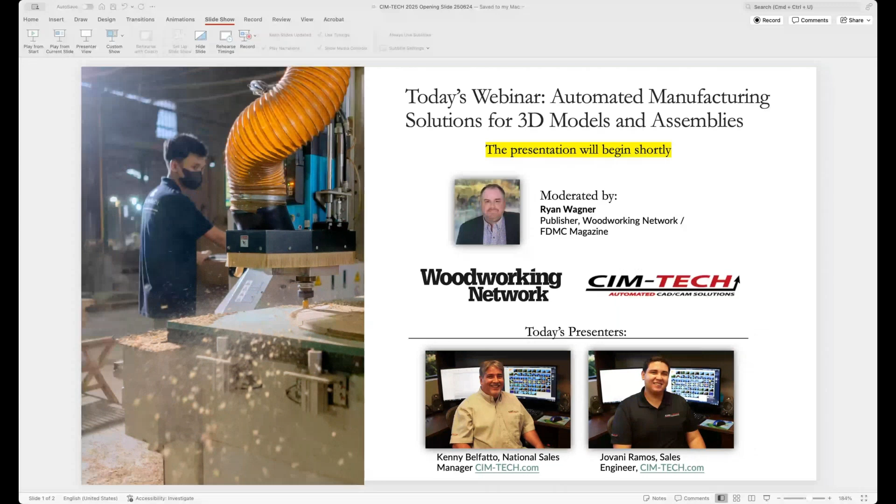Hello, everybody, thanks for attending. Happy Tuesday, everybody, today we're going to talk. Hey, there's Giovanni. Hi, Giovanni. How you doing? All right.

Today we're going to talk about the automated manufacturing solutions for 3D models and assemblies. As we move forward in time, more and more people are moving to 3D models. You always had 2D drawings, but this is the next progression. We'll start drawing in 3D models and assemblies and see how we can manufacture those and make manufacturing easier.

CIM-TECH is the company that makes the software. Our name, CIM-TECH, is also our website, with the dash in there. It's a software company that's been founded since 1986. Even back then, we realized your machine is only as good as your ability to program it.

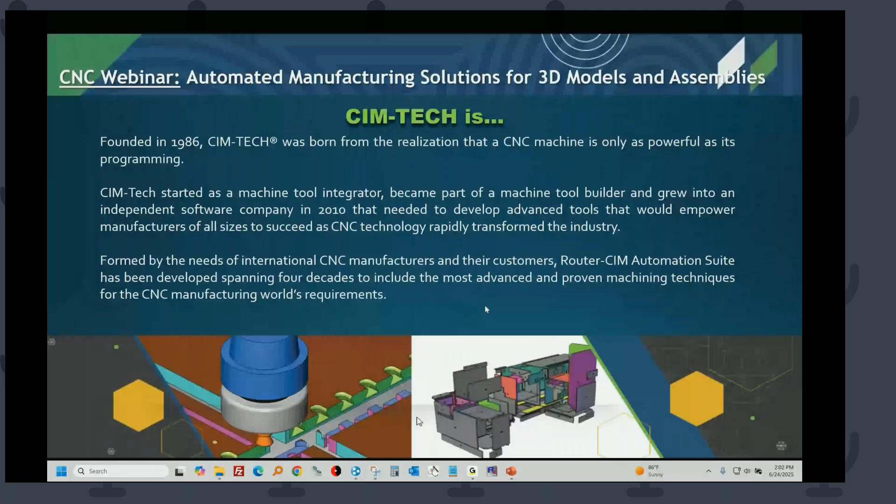You're going to spend a lot of money. Hey, sorry bud, looks like we cannot see your screen at the moment. Oh, all right, sorry about that. Let me find out what it takes to see that. All right, sorry about that folks, I had to pick an extra button on there. Thank you for alerting me to that.

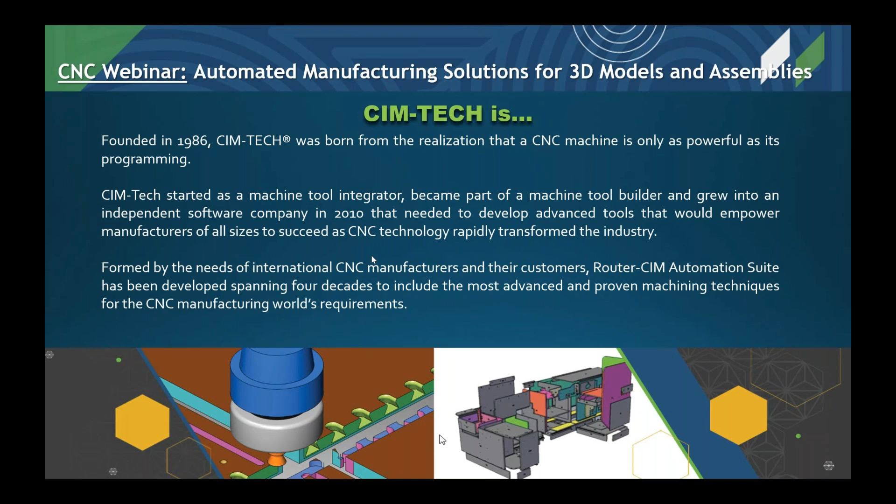Here's our website, cim-tech.com. Again, we realized that your machine is only as good as your ability to program it. Back then, we became one of the first integrators within AutoCAD, so we have both CAD and CAM integrated in the same place. All these features were generated in Router-CIM specifically for CNC routers. It wasn't a different type of package that's converted for woodworking - this was from its inception specifically for CNC routers.

Today's discussion, we're going to talk about the benefits of modeling in 3D. Again, like I said, you always had 2D. Well, with 3D, you'll be able to do a lot more visualization and more information about the design gets captured with the 3D model. Then there's going to be some bottlenecks - it's nice to be able to model it in 3D, see the whole thing, get the weight and all the mass properties and so forth. But there could be bottlenecks, and we're going to show you how we can eliminate those or get past those.

Using this program called Solid-CIM, it's going to bridge that gap and let you take the 3D model all the way through to manufacturing with the least number of clicks, the least number of steps on your part, and give you the best results in just a few steps. After this presentation, we'll have some time for questions and answers as well. I'm also available to do a personal demonstration for you at any time.

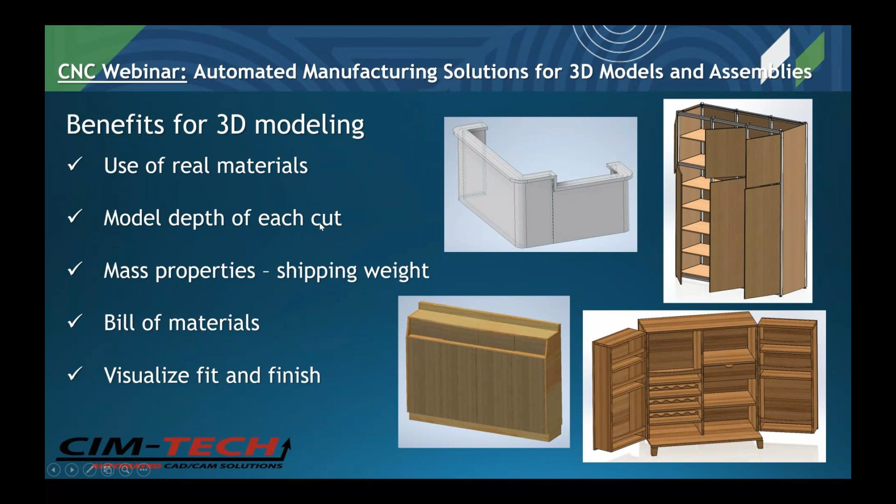All right, so we've got some pretty neat pictures on the screen here, and some of the benefits. Well, first off, you can use real materials. You get photorealistic rendering, and that allows you to visualize the product completely assembled. And those material names you use in your modeling program carry across to the manufacturing as well. When you're modeling, you're putting in the depth for counterbores and dados and rabbets and pockets. That depth carries through to manufacturing as well. When you're in 2D, there really isn't a depth, so we don't know how deep to drill the hole other than a note.

You get other things too from 3D models, like mass properties. You can figure out the weight of the product, the center of gravity. There's a lot more information in the model when it's in 3D.

You also get bill of materials, so you'll know, for example, the total number of square feet of a specific material. So you'll tell it 3 shelves, 4 doors — all the information is in a bill of materials on there.

And you get to visualize the fit and finish. So if there is anything that doesn't close properly or when you assemble it, the program can show you interferences, and it can tell you how much of an interference there is between doors, for example.

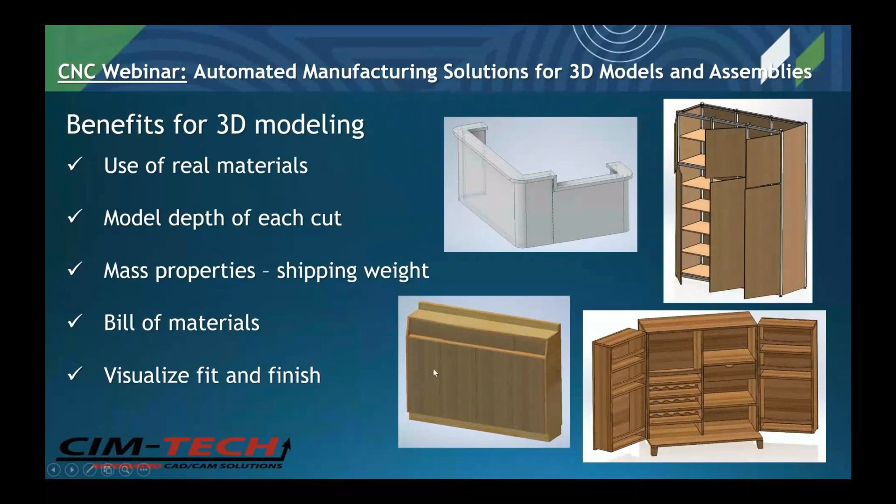Just some of the benefits for modeling in 3D.

Now there could be some bottlenecks too. Traditionally, what people do from a 3D model is make a drawing view. They'll look at it from the top view and make a drawing view, and that gives you an outside edge, the cutouts, the counterbores, the countersinks, holes, and things like that.

But you don't know the material it's on. You don't know the depth of cut for any of these interior objects, and you don't know the thickness from the outside geometry.

So to overcome those bottlenecks, we have the solution with Solid-CIM, which is going to automatically pick up the depth of cut, the material — all the information from the model gets transported.

You can also put in things like label fields in your models as well. You can add those what's called part properties — things like due dates, customer name, work order number, and things like that.

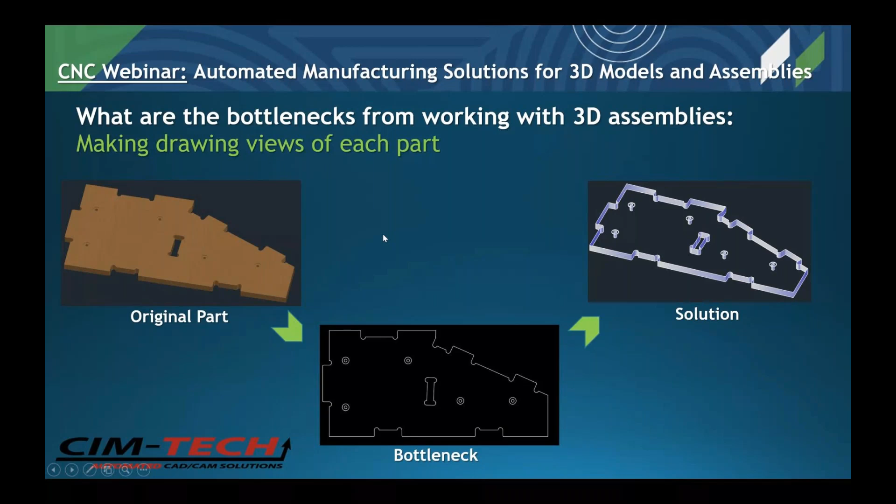So these bottlenecks, we're going to eliminate those using Solid-CIM, where we're going to pick up the name of the part from the solid model, the material from the solid model, all the depths of cut from the solid model, and also any of the extra properties for label fields.

And you'll get another cut list here. It also sizes up the panel so that you can use that for a panel saw if you like.

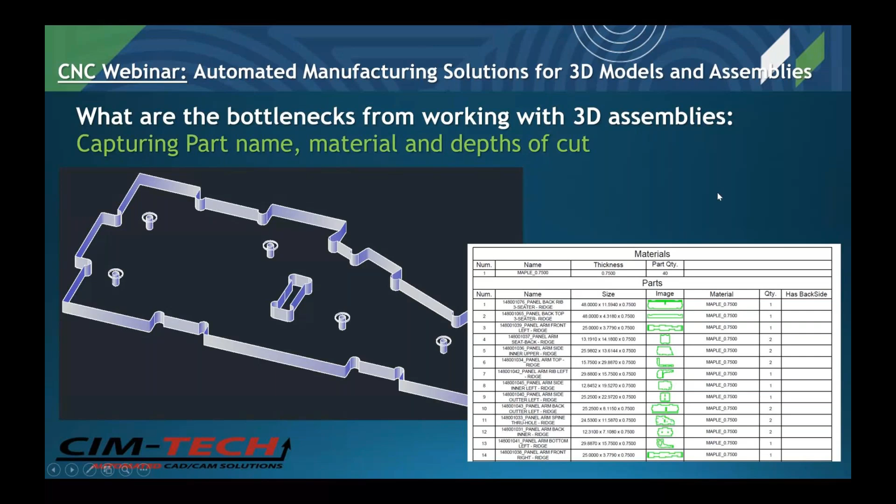All that information from the parts also gets transported through to labels, and you can customize the labels with Router-CIM, because a lot of parts are going to look similar. So you're going to want to make labels so you can find out which part is which.

Some of them might only be just a fraction of an inch off in dimension, so labels become very important, especially if it has the panel sizes on there. You can put whatever bits of information you want onto the labels. We've also got an advanced labeling feature called Touch and Print that lets you touch on a part and print a label.

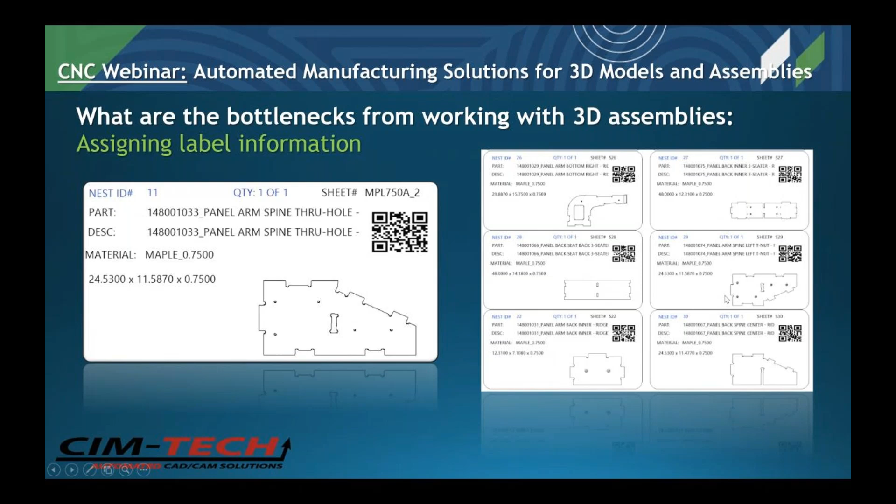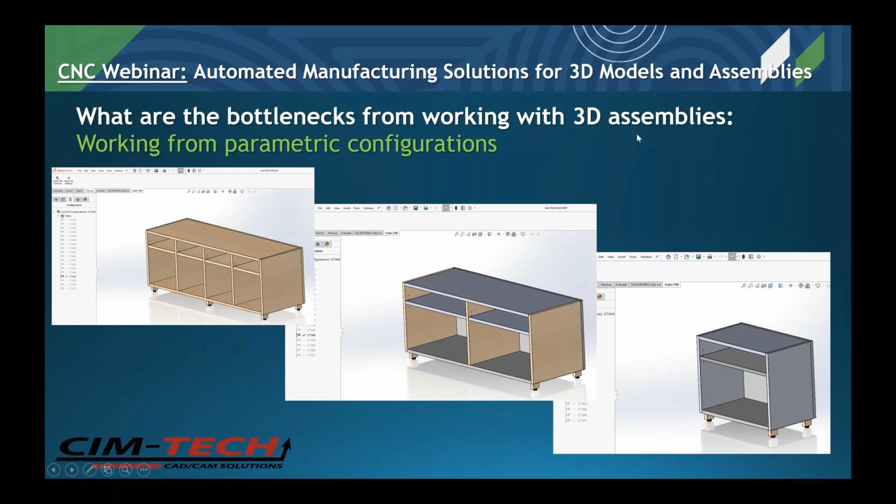You make the configuration you want on the screen, you pick a button called Solid-CIM to go ahead and cut and nest those parts. Big feature — there is no comparison to anything in 2D like that. So you can do these configurations.

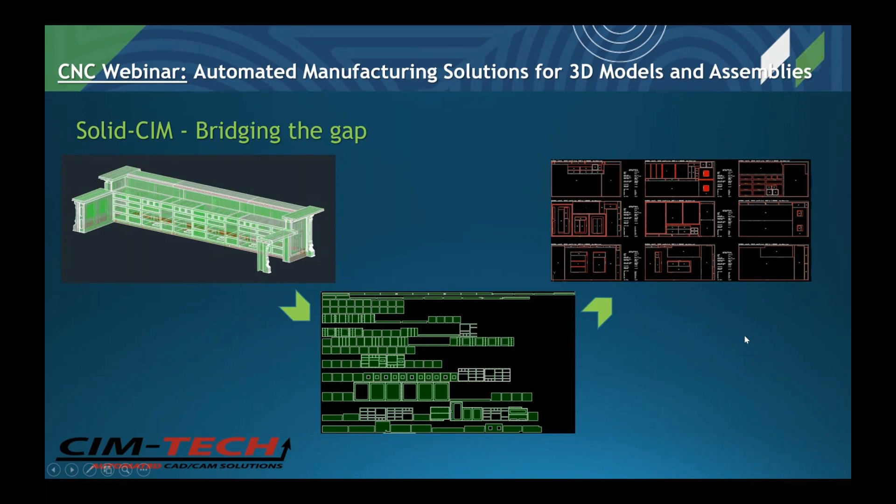Of course, you'll have full control over the grain, and also which side faces up. If there's counterbores on one side and dados on the other, the side that had the most volume and material removed will face up - so the dado side would face up by default, but again, you can change that. And your nest results can have parts inside of parts and multiple stock sizes, stay down, common line, different types of solutions. So let's take a look at a demonstration, and I'll guide us through it.

Here's our web page, CIM-TECH, because there are a lot of different CIM techs out there, so we've got the dash in the name. And again, this was established in 1986 with the same group of guys making the software.

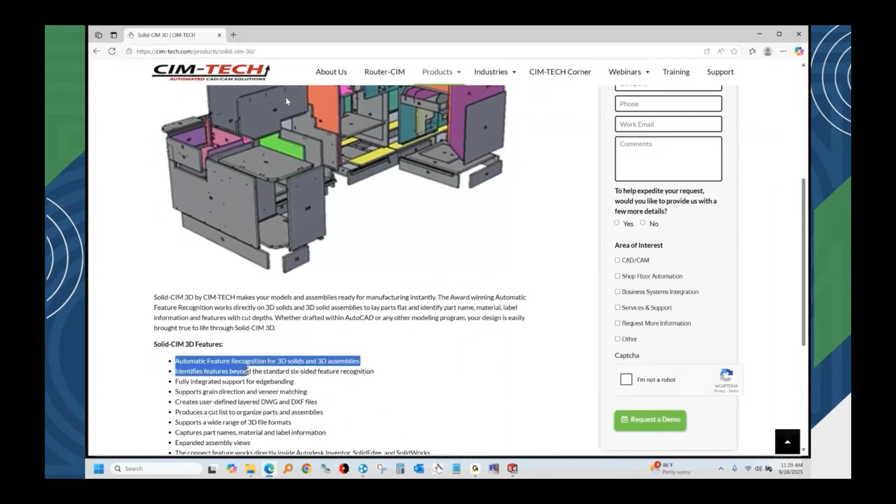We've got a whole suite of products. The Solid-CIM is the one that was uniquely designed for the 3D modeling. It does what's called automatic feature recognition.

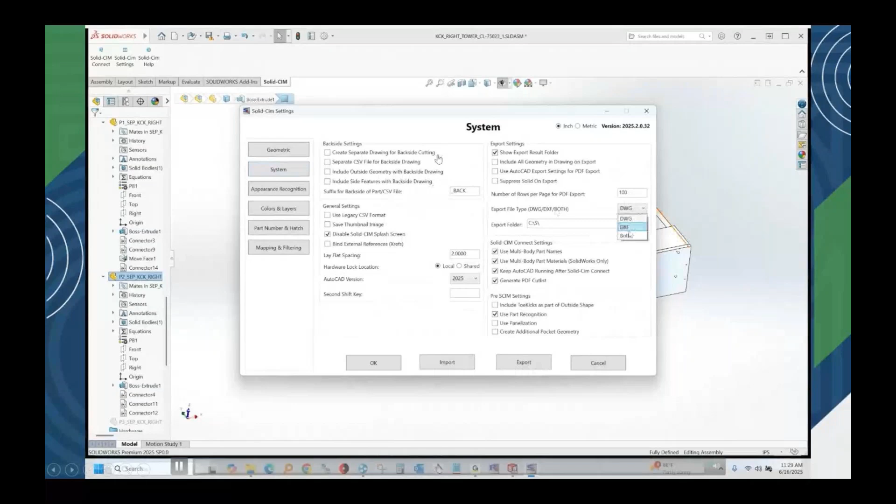Now here's an assembly from inside of SolidWorks, and the parts have a material in SolidWorks and they have a name in SolidWorks. And you've got some settings so you can ignore things - you know, if it's smaller than a 4-inch cube or thicker than 2.5 inches, you can put in these minimum and maximum settings. It'll make drawings or DXFs and you choose the layer names.

It'll put things on different layers for you, so any kind of holes will be on layer hole. You can also exclude or include different properties of the objects in the assembly - so take only materials that begin with MDF. You know, if you had glass and stainless steel and things like that, you could exclude those, or you could just say give me the MDF material.

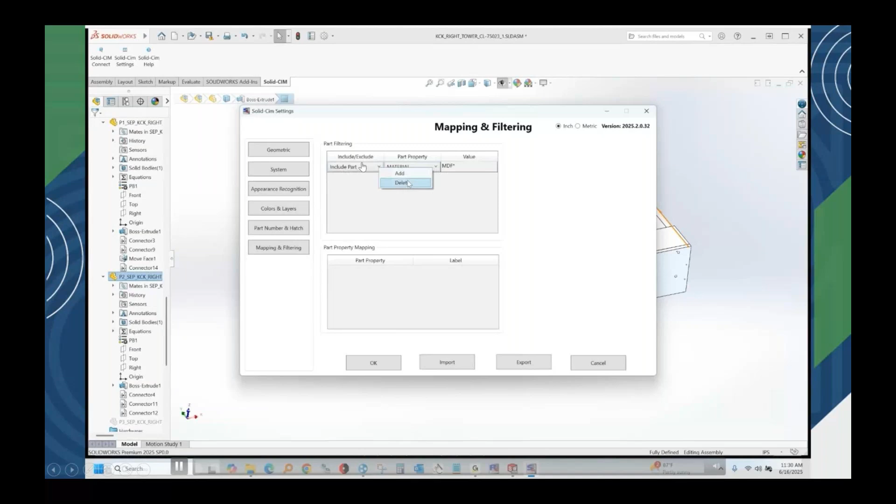That's a new feature in Solid-CIM 2025 that makes it so you don't have to suppress anything. Now it's just one click in SolidWorks or in Inventor or in AutoCAD - just one button pick that does the automatic feature recognition. And what this does, it converts the model into those intelligent drawings with geometry on different layers.

This just takes a couple seconds, and it's going to give us a cut list that has the name of the part, the material, and the quantity. It's going to have all that information built into the cut list, and then we could just cut right from the cut list. So this is the feature recognition process.

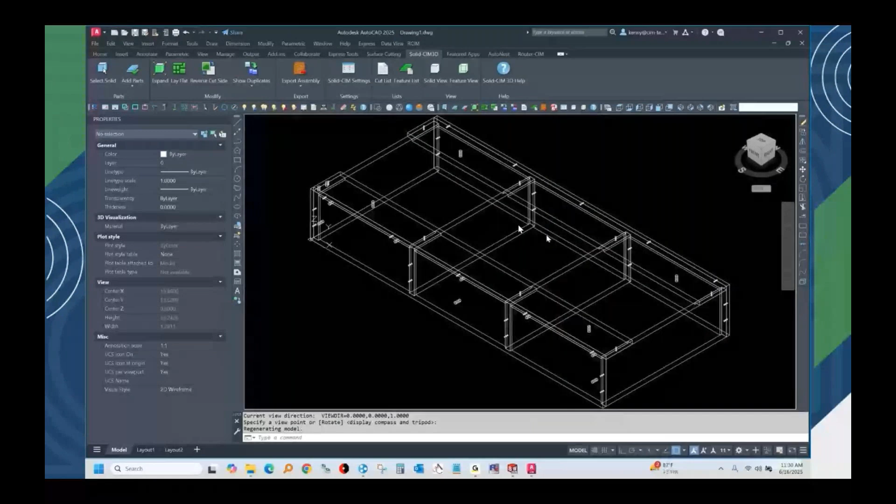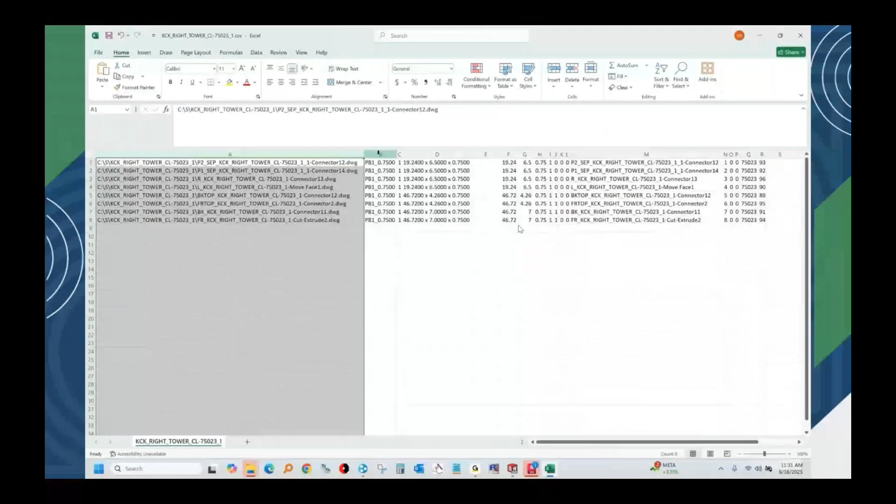It's inside AutoCAD now, and here's a CSV file - it's like an Excel spreadsheet. That's the cut list. It creates that, and there you'll have the names from SolidWorks are in there, and their materials are stored in the CSV file or the cut list. So there you see name of part, material, and quantity. Then there's the different panel dimensions and the different X, Y, and Z panel dimensions as well. And if you had any label fields, they'd be in these other columns as well.

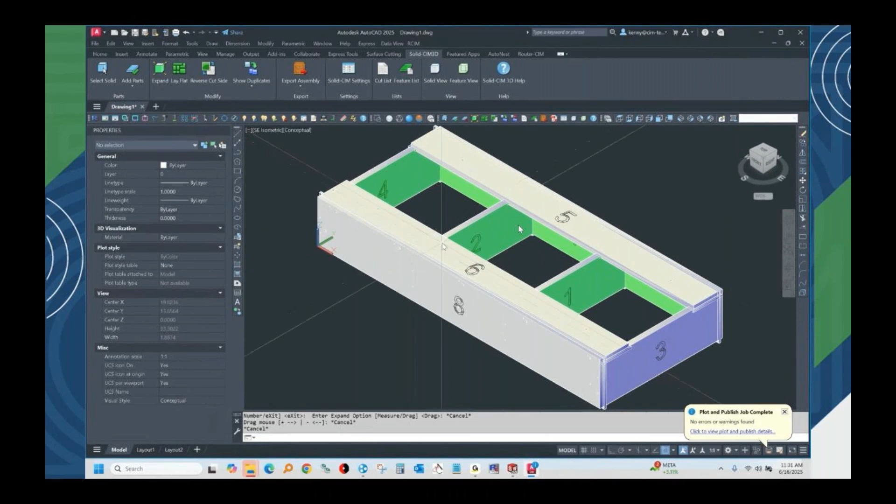Now, right from that CSV, you can cut it, and then it begins processing the toolpaths and making all the single part programs, the labels, and the nests and everything else. But before I do that, there's a neat command here called expand, which is useful to see like an exploded view of the model. You can either type in a distance or you can drag with the mouse to do the exploded view. This is useful because you can make a copy and paste this into a Word document or put it in a PDF file.

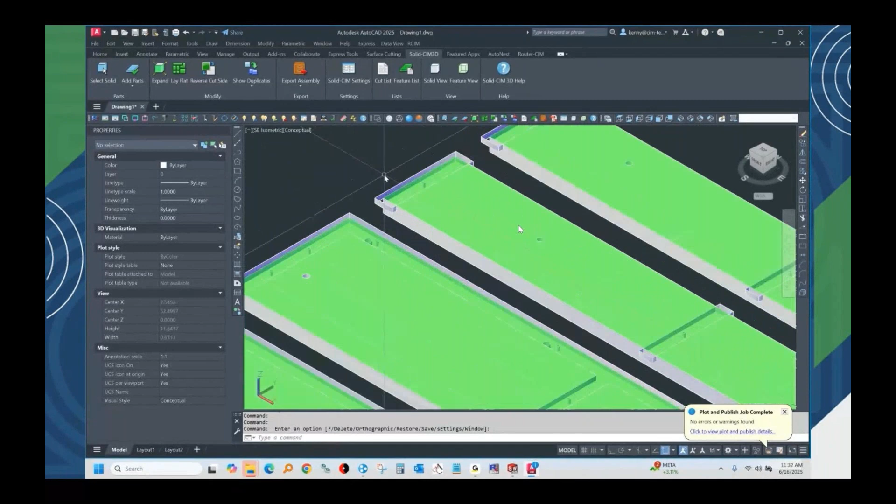At this point, it's just a picture, and then you can see in AutoCAD what the features are. It made something on layer pocket cut, and it picked up the depth that was specified when they modeled it. We have a rounding feature as well - if you've got pockets that are 0.24 and 0.26, they can all be rounded out to 0.25 in the layer name if you like.

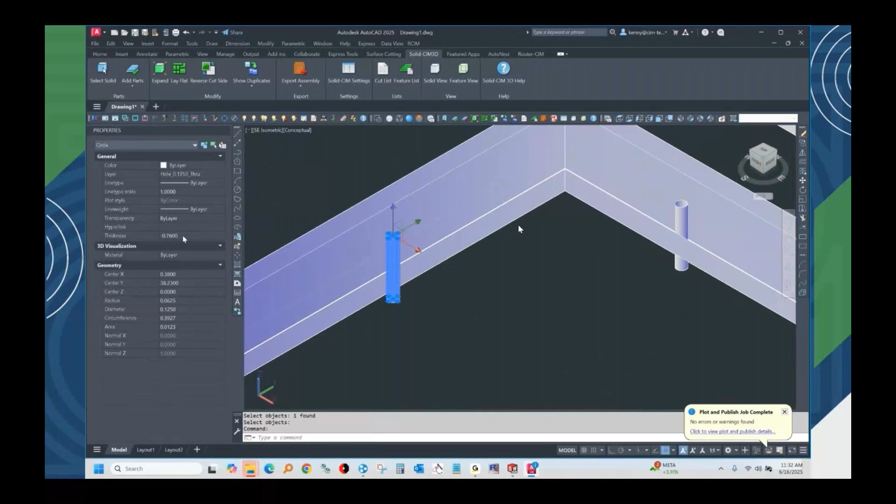There's some holes, or drill holes. They're on a layer called hole with the diameter and the depth. That's the step that saves the most amount of time, especially if you're used to working from 2D drawings, making a drawing view of the model.

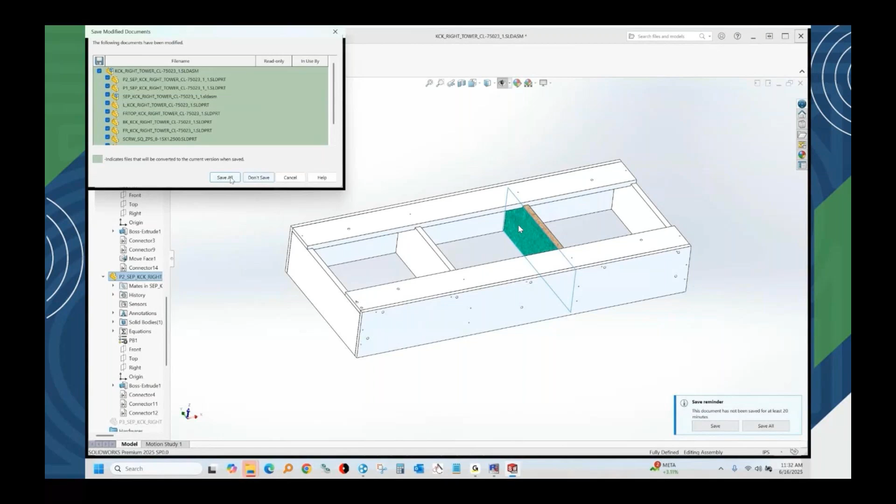It picked up all those depths. It picked up the material name. And in the next example, they'll also have the label field information. So here they're going to cut that CSV file, optionally save the model, or just exit out of SolidWorks altogether. And now the Router-CIM program is going to go and act on that CSV file.

Now, this is showing you our Solid-CIM and Router-CIM program right out of the box, but we also offer something called Auto-CIM, where you can just drag and drop Excel spreadsheets or 3D models into a folder, and they're acted upon automatically. So we do have quite a bit of automation included right out of the box, but if you want even more, we can have completely hands-off manufacturing, and we could talk about a program called Auto-CIM with you if you're interested in seeing that.

It's completely hands-off. You just drag and drop models or spreadsheets. There you can import from CSVs and from Excel files. They're importing this CSV file. It knows what each column is. It knew that the name was the first column, then the material, then the quantity. But you can map out your own spreadsheets and tell it that the first column is quantity, for example.

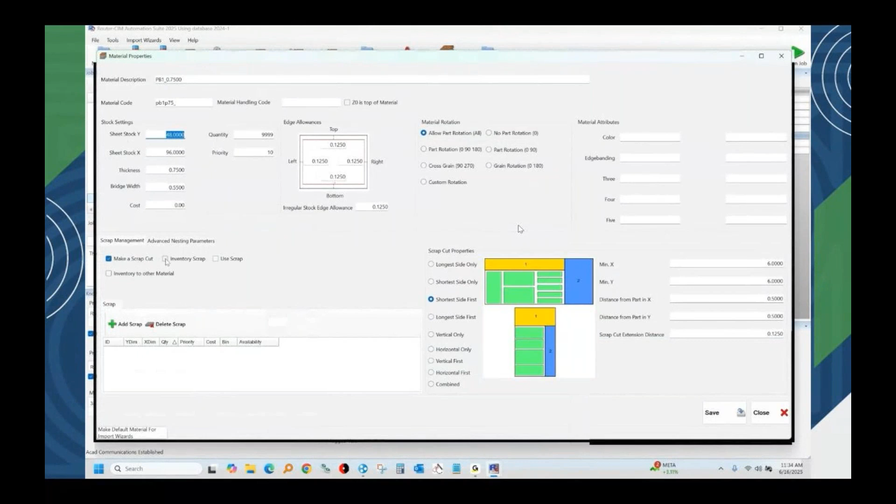There's your material properties and whether things can rotate, make scrap cuts, save scrap, use scrap, skeleton cutting. You can also put in alternate sizes. So if you have materials in 4x8, 5x10, 5x12, we can nest by yield or by price or priority. So you can tell you have 5 sheets of 4x8 and then 6 sheets of 5x10 and 8 sheets of 5x12. You can put in these different material sizes and their costs, and then you can nest by priority or yield or price.

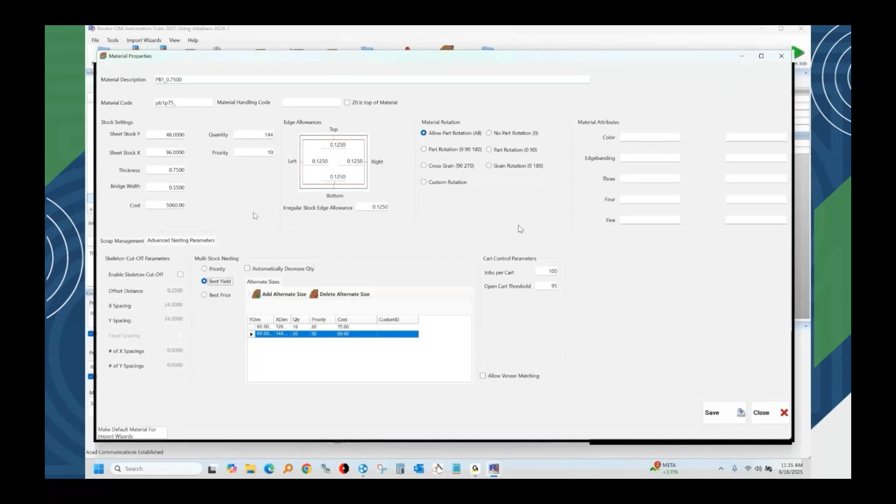So they did add 5x10, 5x12, put in different costs, and I'll check the box for best yield or best price. And it goes through the list and tries nesting in all the different sizes and gives you the best yield or the best price. If you don't like having a lot of scraps, then best yield will fill up the sheets for you pretty good.

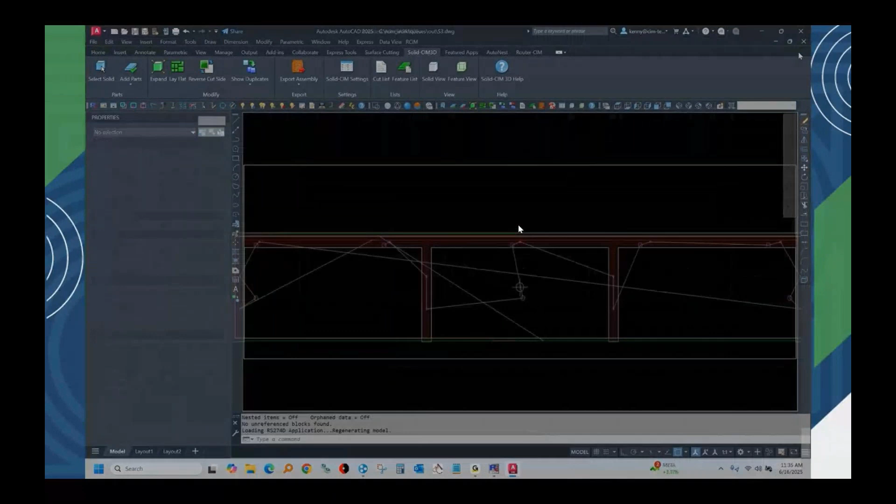They're also going to do a part multiplier, 10 of these. So you could say why just make one? Let's make 10, 20, 30. You can also mix multiple jobs together. So give me 10 of these with 5 of these and 6 of something else. And all of the MDF from those jobs will nest together. All the plywood from those jobs will nest together. So there's advanced nesting features in there.

At this point, it went through and processed the parts and lays them out in the nest. And there it looks like one of the larger sheets and 2 of the smaller sheets. And each one of those gets printed to a PDF file or to a regular printer or both. You can do electronic print or hard copy print.

And when you open those results, you've got all the data there for your single part programs, your nested programs, your labels, your reporting, simulation files. It's all saved, and that can go to your local drive or to a network drive. There's your NC code. And of course, we make post processors for just about any machine out there.

And the PDF file has, this would be what would print out to a printer. How many of each sheet? Looks like I used 2 4x8s and 1 5x12. And it prints those out as well.

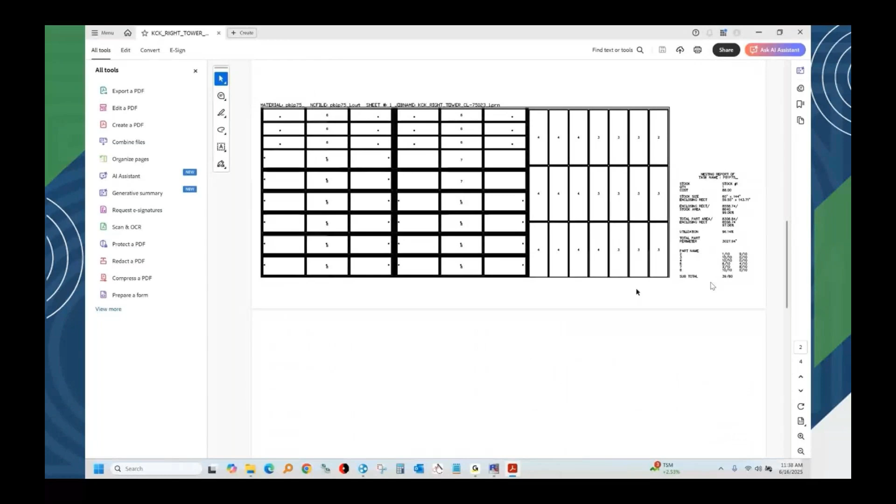So you can see where to put the labels on there. It's got the part numbers on it. That's the part number of the row from the spreadsheet. Here's your labeling. So RouterCIM includes the full labeling, and you can customize these with whatever data you like. You can put 1D barcodes or 2D barcodes on there.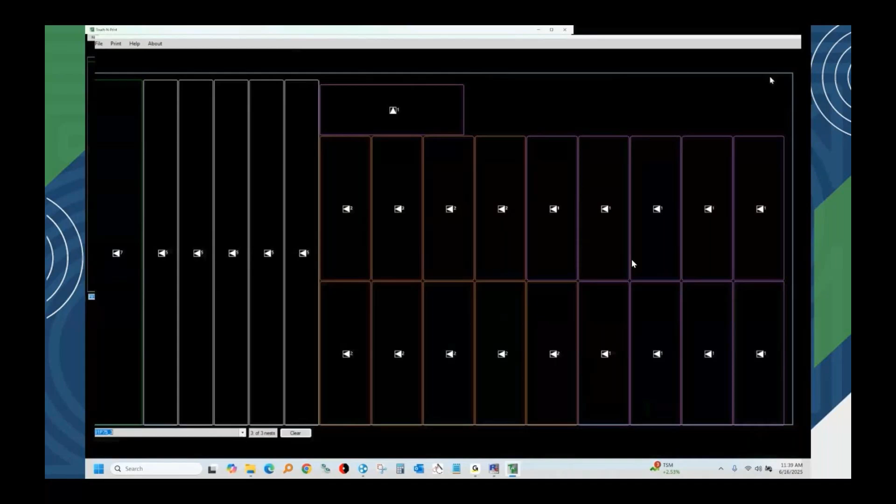And then there's also the touch and print program that I discussed. This lets you see what the nested sheet looks like, and you pick a part and print a label. Pick it and print a label. I had it set to print to PDF files, but you can print those to the Dell or the HP LaserJet, and they'll print whatever printer you want. And it shows the whole job, and you touch and print, touch and print. It's like on-demand type of labeling, right? Otherwise, you have to look at the sheet and see where you're going to stick the labels. There's all the individual parts with their toolpaths on them and the individual programs.

So that's for a remake. Let's say if a part moved or fell, you could remake it with the program already there for you.

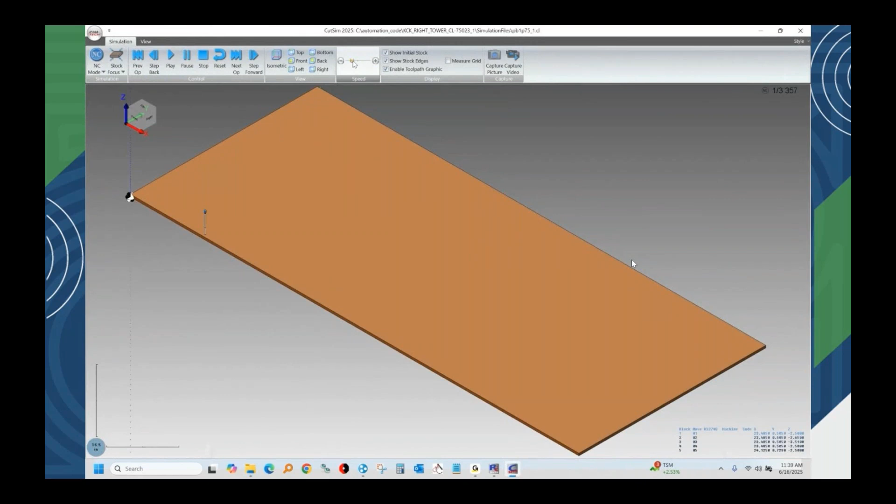There's a simulation as well that lets you pick and see what the toolpaths look like. I think with this one, I used the tool stay down type of nest. You can set the speed, and you can make this into a video as well.

But it's basically showing you the sorted order, and we use what's called a rank number. So my drilling, for example, is rank number 1, the dados are rank number 2, and cutouts are rank number 3. You can make something that's rank 1.5, 1.6, 1.61, so you're never stuck between any 2 numbers. You have an infinite number of other toolpaths that can be ranked.

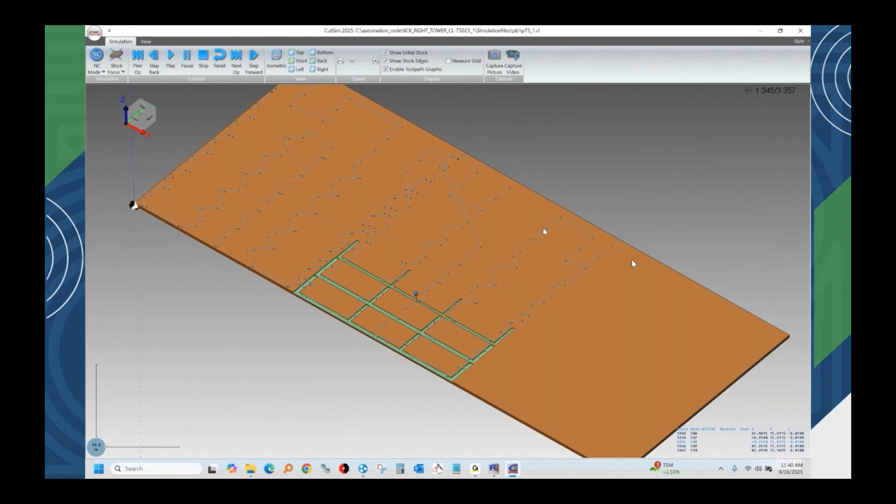But that's the order at which you cut things in, right? You don't have to pick each one of those pieces in order. When you want to make the program manually, you'd have to touch everything to tell it, I want this, then this, then this. We can sort that order for you, and it does go in a closest point. There's all different sorting methods that we have as well.

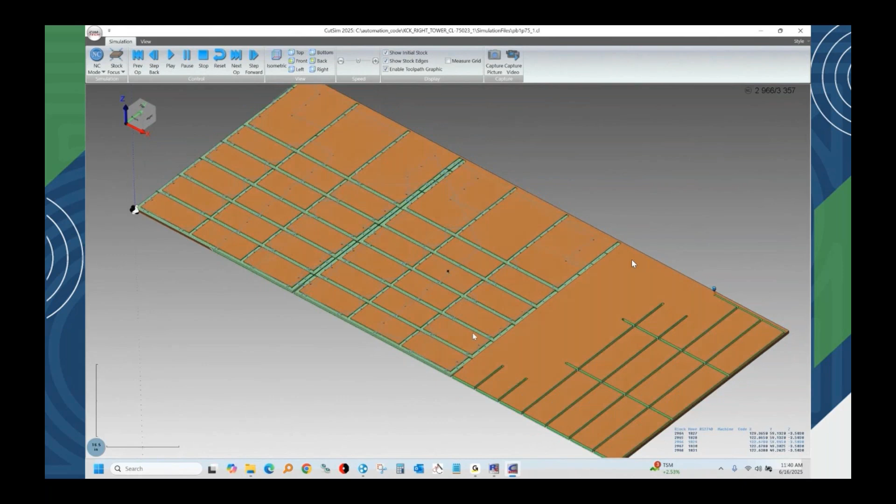And there's the stay down nest where the tool is staying down and connecting from one part to the other without lifting up, and that it's great technology for reducing cycle times. We can also do common line and 2-sided nests as well.

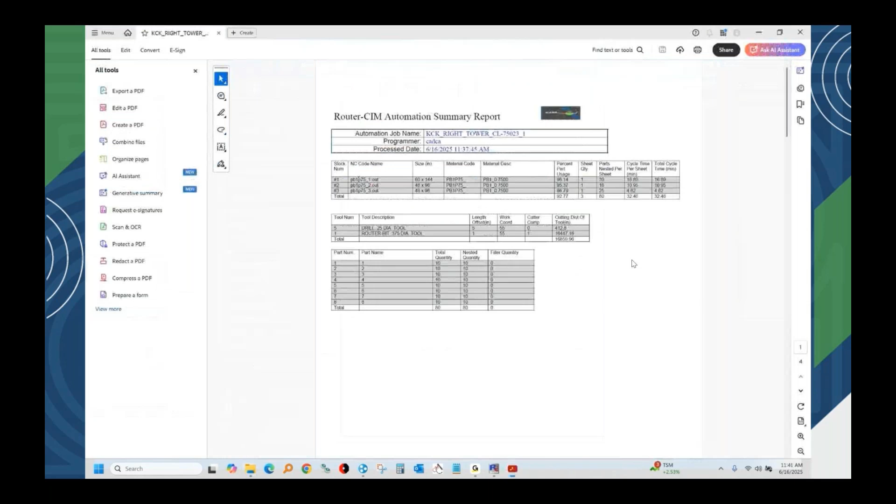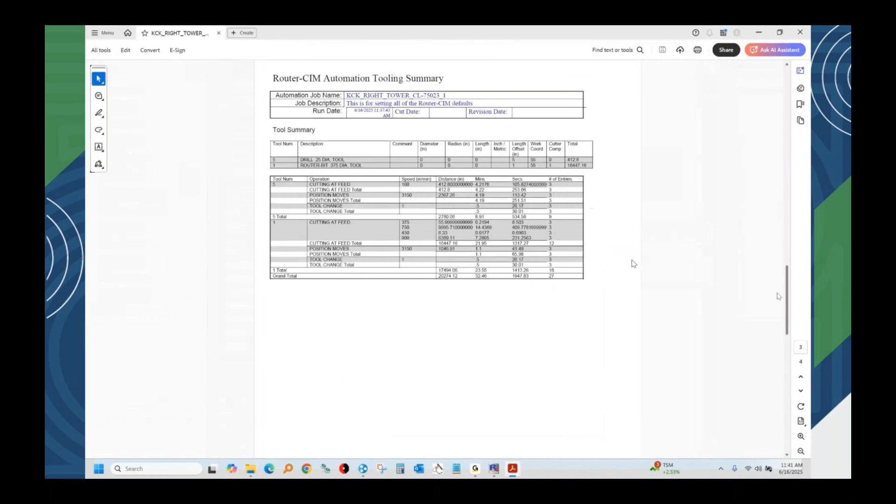You get a lot of reporting with Router-CIM, and the reports have your cycle times for the whole sheet, how many parts are on each sheet, what kind of scrap area you got. All the reporting is saved as either PDF or Excel files, and you can use either one, it saves them both. And you can estimate jobs before you take them.

You can run the whole job, find out how much material you're going to need, and how long it's going to take to run on the router. All that data was stored from running that job, and it was really just 2 clicks.

One click from inside SolidWorks, it did the feature recognition. Then another click on the cut list, or within automation, pick import from SolidSim and then run it. So it's very few clicks.

Now here's a different example from inside of Inventor, and it's almost identical, it's got a different toolbar, right? So they open up an Inventor assembly. And these, when you use an Inventor, you give everything a part name and you give everything a material.

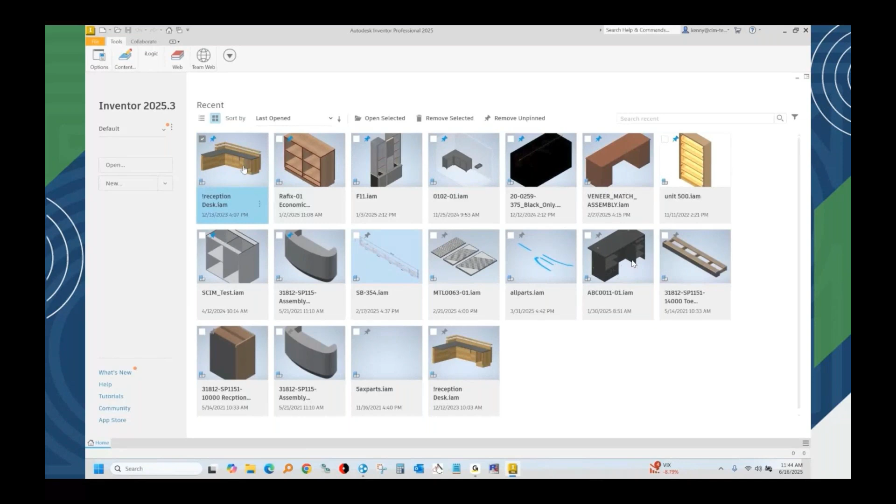And by the way, even if you don't use materials, we can do it, we'll just separate everything by thickness then. So if you leave everything on generic material, if you don't assign any materials at all, then we're going to group them together by thickness and say material 0.75, everything that's 3/4 of an inch thick, right? Material 0.5 would be all your half-inch material.

So it's worthwhile to use materials because, of course, if you use the materials, you get photorealistic rendering. That's a big advantage to the materials. Plus, that has a density, so you can get the weight of the parts, maybe for shipping, for example.

These parts are on a material called maple. This one is on a generic material, so that'll just be called material 0.75. There's some SWPL, solid wood, plywood.

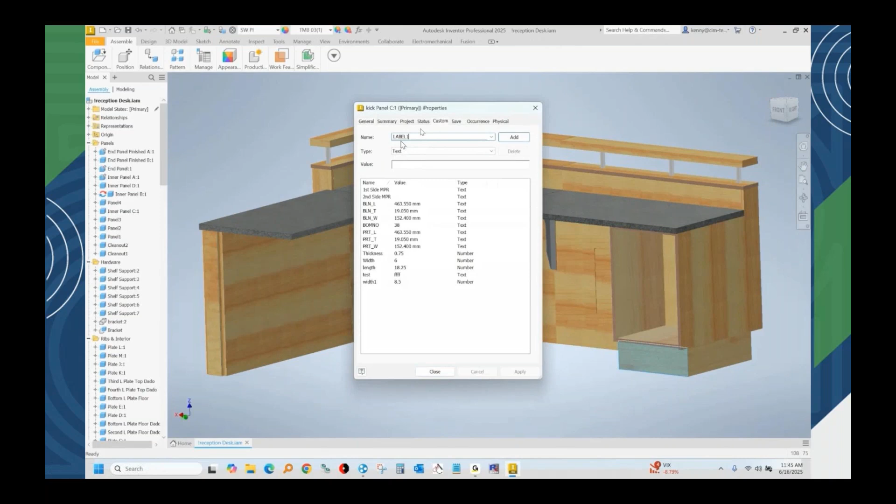Here's the iProperties, and they're going to add a label field. So you can just call it label 1, label 2. You put whatever you want in the label fields, customer name, work order number, whatever.

And that's during the modeling phase. So during your modeling, you can attach manufacturing info to the parts.

And they're going to pick the Solid-CIM button, but I see a little metal bracket here on the part, right? So we should have suppressed that, or turned it off, or filtered it out, exclude anything on steel, for example. But there's many places where you could turn that off.

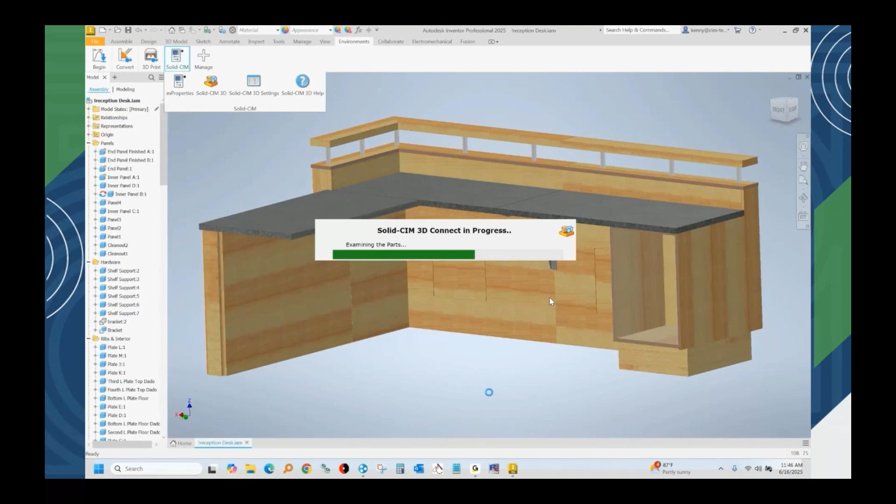So even though they're going to run it with that bracket on there, they'll go and remove it later. So you can open it in the cut list and you see, hey, anything that's made out of glass, remove that, anything that's made out of steel, remove that. You just delete it out of the cut list, or you could delete it when it lays the parts out flat too.

So the next step, here's the automatic feature recognition, and this again will make us the CSV file or cut list.

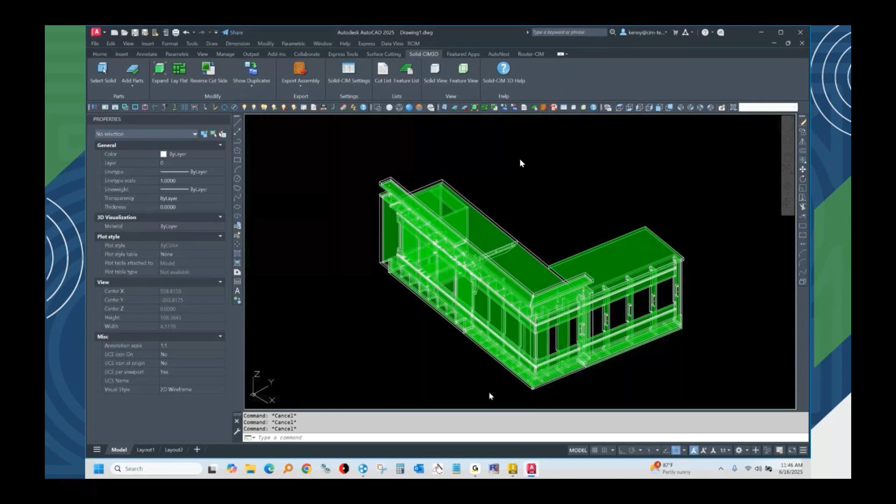There's the CSV that it makes, to replace it. You can merge it with another job too, and that's going to give us all those parts. We'll just import that in the Router-CIM and do another job that's from an AutoCAD 3D model.

So you don't have to cut that one right away. They're just going to show you there's the right click cut if you want to, or you can see that there's that label field. You see the names—even though the material is just called maple, it called it maple. It added 0.5, 0.75, and you can see some different quantities on the parts there.

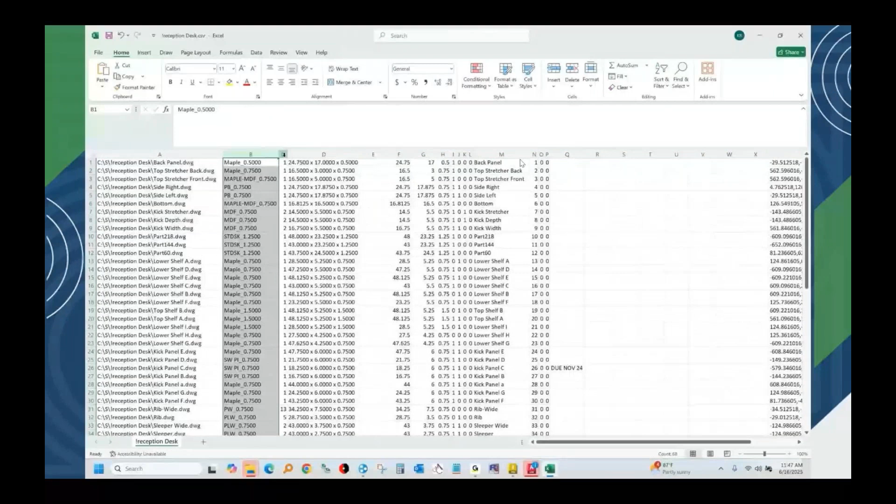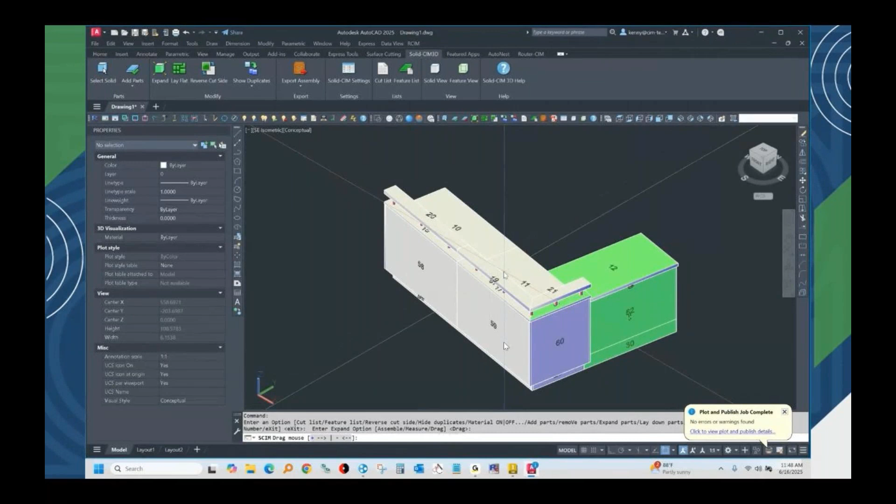The expand and the lay flat is optional. Many of our customers tell us that expand thing is really useful for showing how to assemble the products, and sometimes they just use that and put it into a Word document or the assembly guide.

You could put a specific amount that you want to expand, and then you could also reassemble. Once it's expanded like this, you can further move parts out manually, so you can just use move or copy.

Here they're going to remove that bracket, right? So they're picking remove parts and touch on that bracket, and get rid of that out of the cut list and then re-export it. There's many places to do that—it's no big deal.

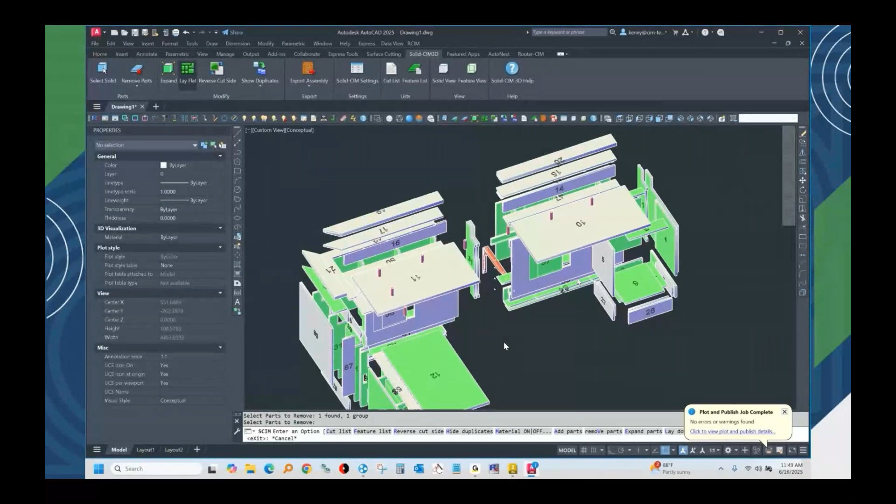You can see the lay flat, and again, all the parts will be long in X by default. It picks up all the features—beveled edges, counterbores, countersinks, pocket screws—they're all in there. Horizontal routing.

You might have heard of 6-sided feature recognition, where it could recognize features on the top and the bottom and the left and the right and the front and the back. Well, we do a step more than that—we have all-sided feature recognition.

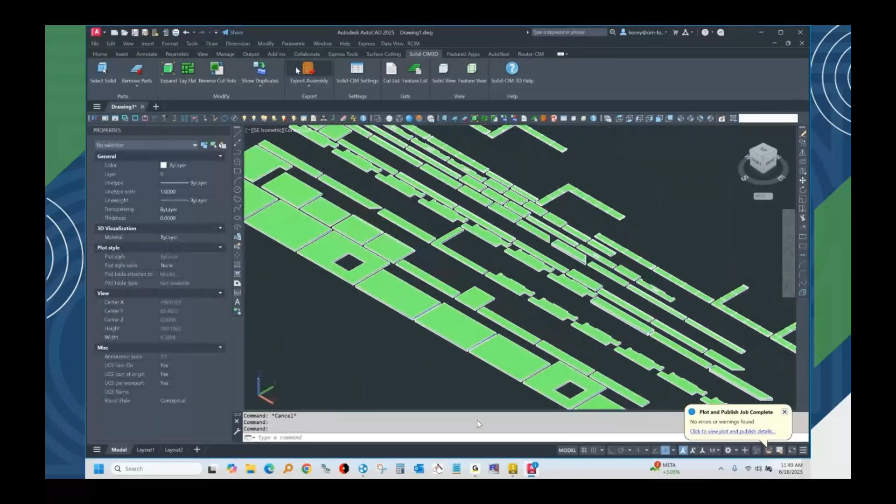So if you had like a stop sign and you had drill holes on any of the odd faces of the stop sign, we would pick up the drill holes on any of those odd faces. A lot of software only gets the 6 sides. We do all sides of a model.

If you had an aggregate head, for example, a 4-axis aggregate, you could model and drill holes on any of those sides.

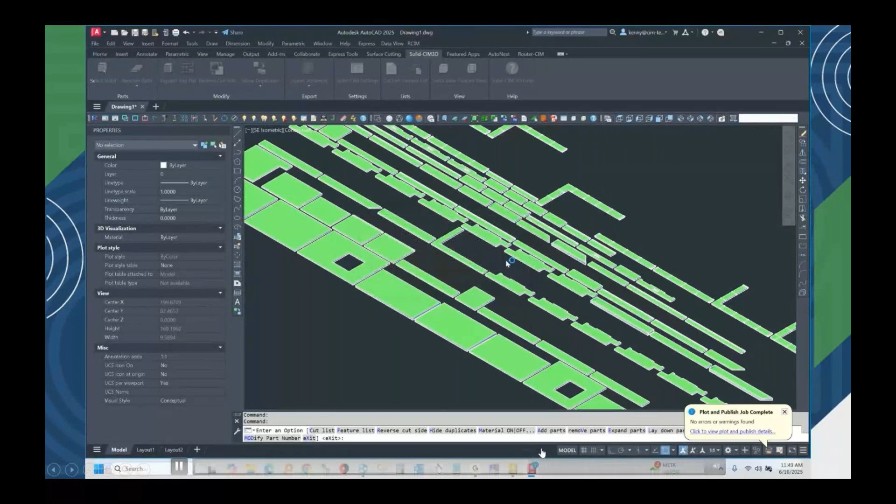This is going to re-export the list without the bracket. And so now I have a new list, a new date and time on there. Those are the things that were ignored—see, they turned red. And then there's all the good stuff that is going to be cut.

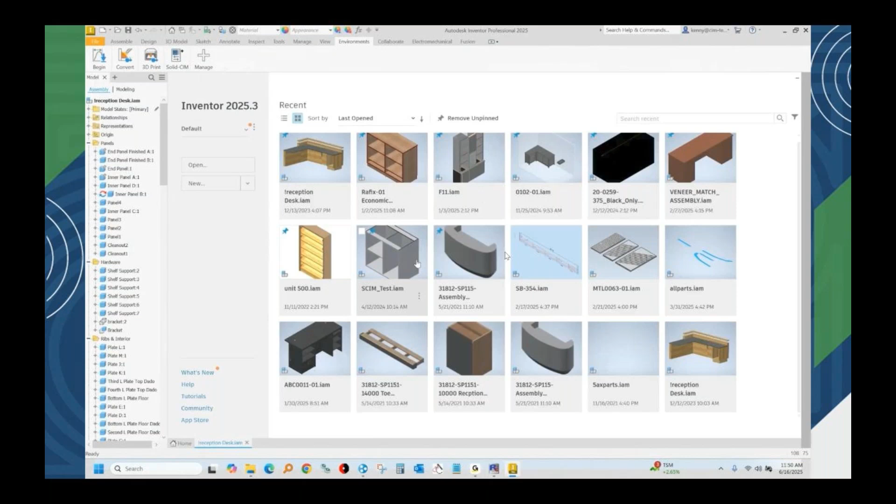That's an example from Inventor. It works the same way from SolidWorks, Inventor, or Solid Edge—it's just one button click. Now, what about everything else like Creo or CATIA or Rhino?

Then we use regular AutoCAD, and we can import from all those different sources. You can import step files, SAT files, Creo, Rhino, 3DM files—there's a whole list of AutoCAD import abilities. So you can import solids from any other source and then work with the model from AutoCAD.

We had the same button click, and also in AutoCAD we had the ability to name parts using just the AutoCAD part properties. So here we're importing that desk, and that'll build a job for us.

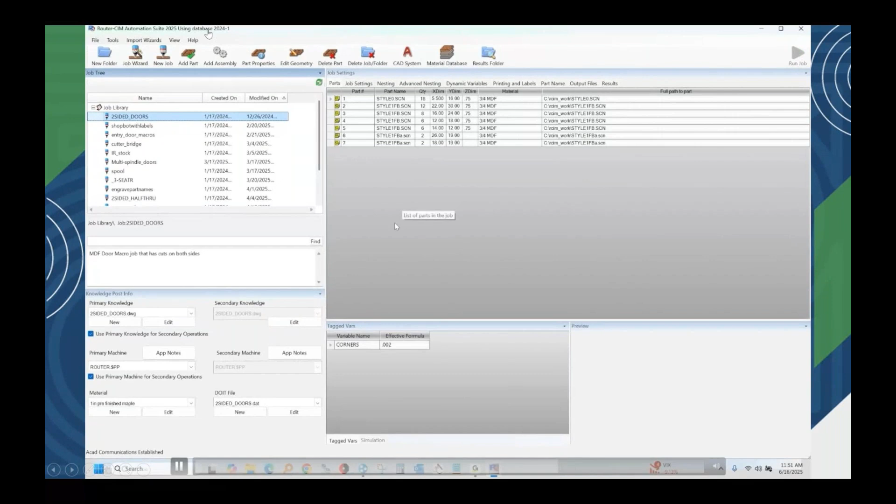You can see this job tree, it's a SQL Server database is what it is. So you can have multiple databases—you can have a database for each customer, for example. There's the part multiplier again, and then they could run that job.

But what he's going to do is start up AutoCAD and then just open a 3D drawing in AutoCAD. You can just type in import right inside AutoCAD and import from all those different sources too. So here's an open, grabbing some drawings from a folder.

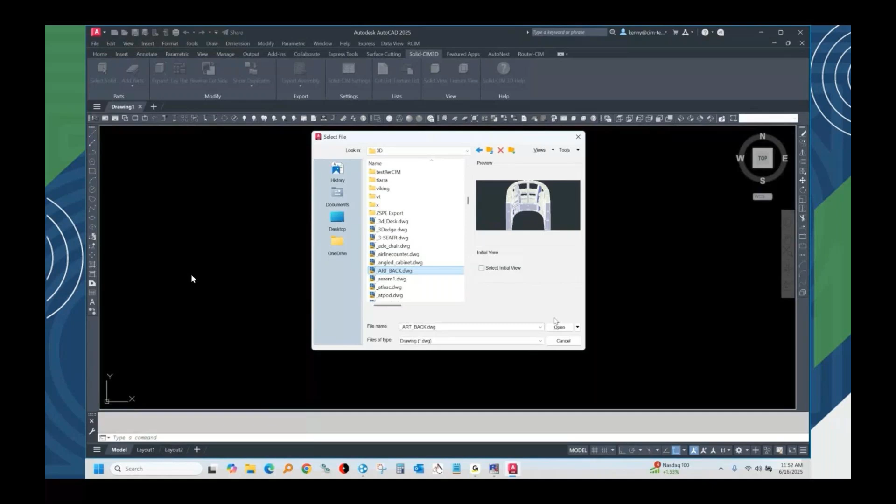These are 3D drawings—they're already modeled in 3D. So you can use not just Inventor, SolidWorks type of parametric models. You can grab any kind of 3D models you draw in AutoCAD too.

And there's the same button for Solid-CIM. You've got the Select Solid button, and you can do the same thing that we did in the other programs—we can do the work from an AutoCAD drawing. So not everybody's ready for a parametric modeling program, but a lot of people might be drawing 3D models with AutoCAD. You can work with those as well as parametric models from SolidWorks and Inventor or Solid Edge.

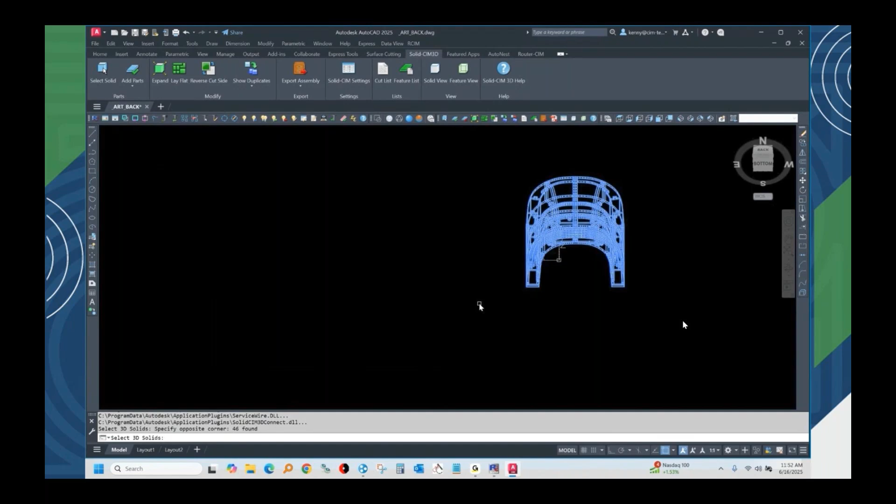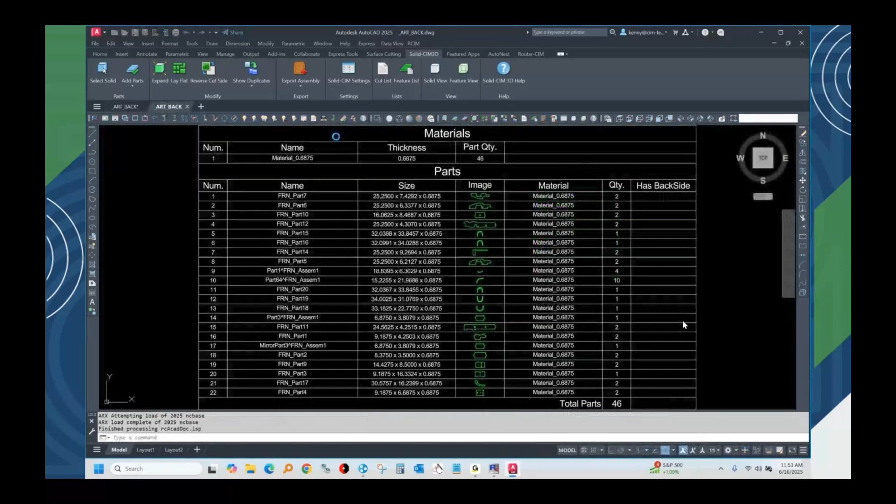Now, once these parts are laid out and nested, you can also mix in your own 2D drawings. So you can add 2D drawings and 3D inside the same assemblies. Here's that cut list it's making, and these have part names and materials and quantities, and it can lay them flat.

It's very popular for the frame industry or plywood frames. Here's the import on that cut list that it just made.

So now he's got 3 different jobs, one from SolidWorks, one from Inventor, and one from AutoCAD. Those 3 jobs are right here in the list.

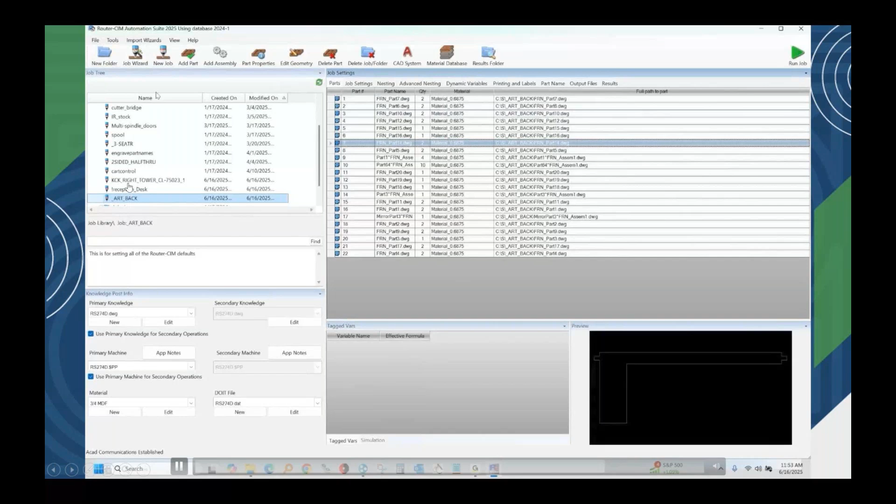We can make a new job and pick add assemblies, and say I need 3 of the chair, 2 of the reception desks, and 3 of that other thing, the tower. So you can put in quantities there.

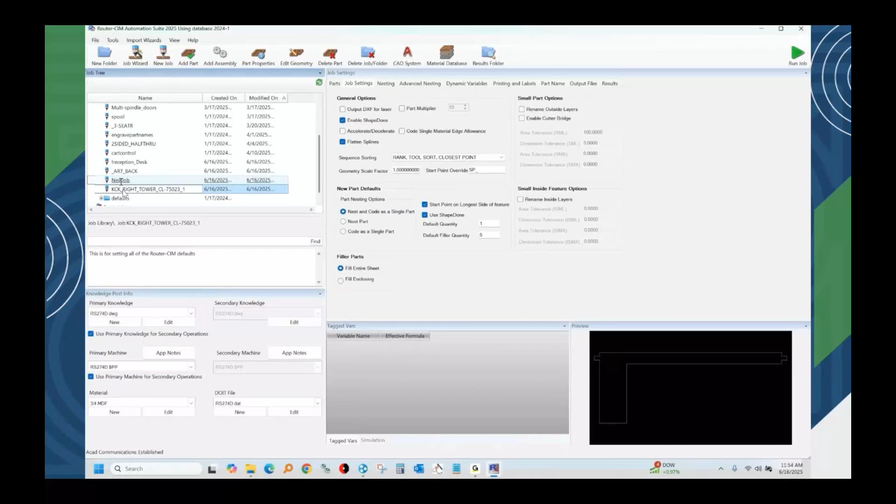So this is a job that has other jobs inside of it. For that one, we're going to turn off the multiplier, because instead of having 10 - if it's in a new job here, whenever you set one of those, you'd really get 10. So there's a way the multiplier can multiply even further. But there you can say so many of each of these parts.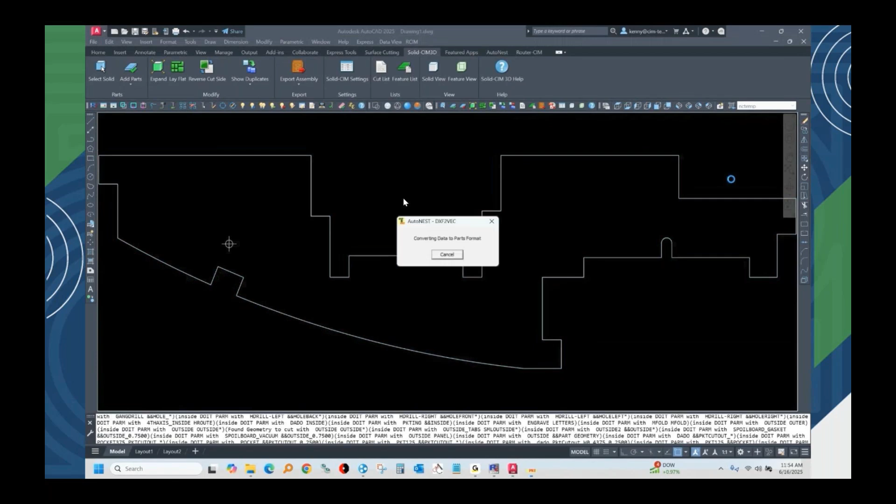So you have a job that has other jobs inside of it. Very useful, because let's face it, you're going to maybe model a desk, model a cabinet, and model a table. And you can say, give me 3 desks, 2 tables, and 1 cabinet.

And that's what's going through the process right now. It looks at the layers, makes the tool paths, the layer knowledge each time. Anything on layer cutout that's an inside cut, anything on layer outside gets outside. And we could specify different sizes of small parts too.

So you have a way to recognize parts that are large, small, and extra small - 3 different sizes. And the smalls, for example, could have a tab, and the extra smalls could have an onion skin. And the largest can go counterclockwise, and the other ones go clockwise. So you can specify, or at least rank the number: the extra smalls are rank 1, the smalls are rank 2, and the larges are rank 3. You want to be able to cut the little guys first so you have the most vacuum.

And here's all the different materials being nested upon right now. So you could have maybe 3, 4, 5 different materials, and they'll all get processed for you automatically. So out of all those different jobs, there's that multiple stock size again, where we got different size materials.

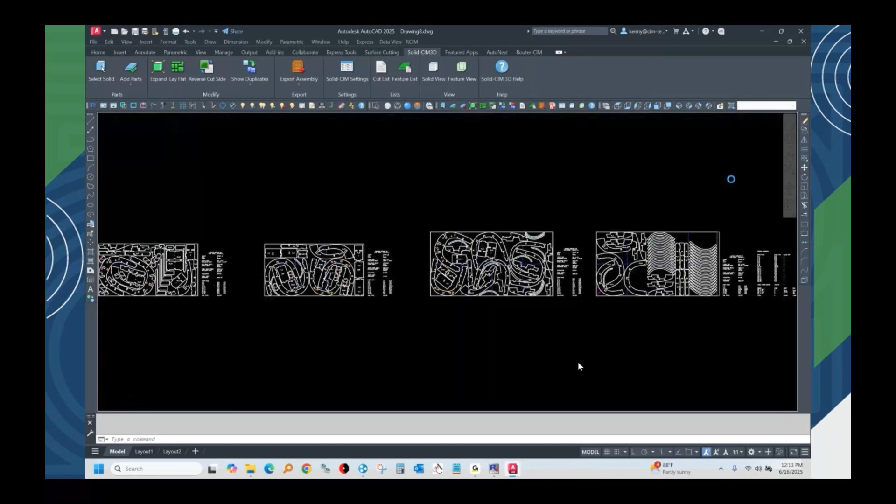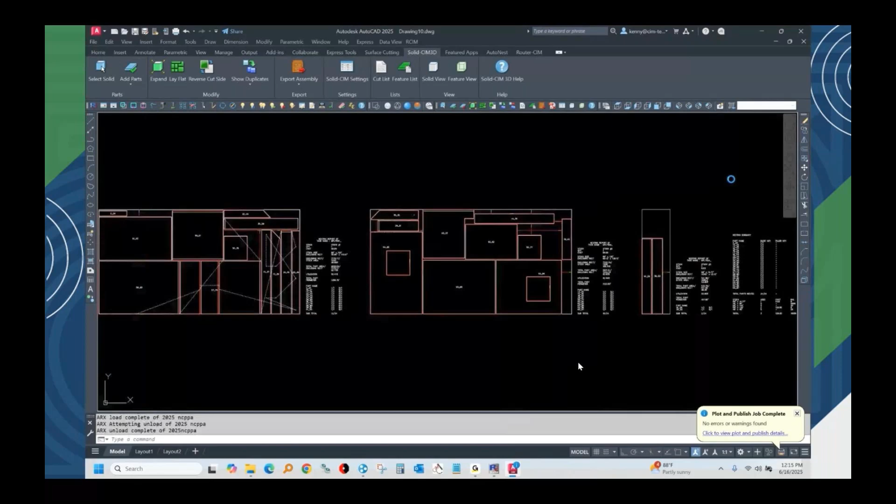And that's a tool stay-down nest, even on these odd sizes. We're using stay-down version 3, which has a built-in overlap and an arc in and an arc out. That's as good as it's going to get for stay-down. It means your tool paths will connect from one part to the other very smoothly without an abrupt stop, lift up, or plunge.

There was a piece of scrap left over on one of those jobs. You can cut this, make a scrap cut, and save it for next time. So there's automatic scrap cutting and saving in Router-CIM.

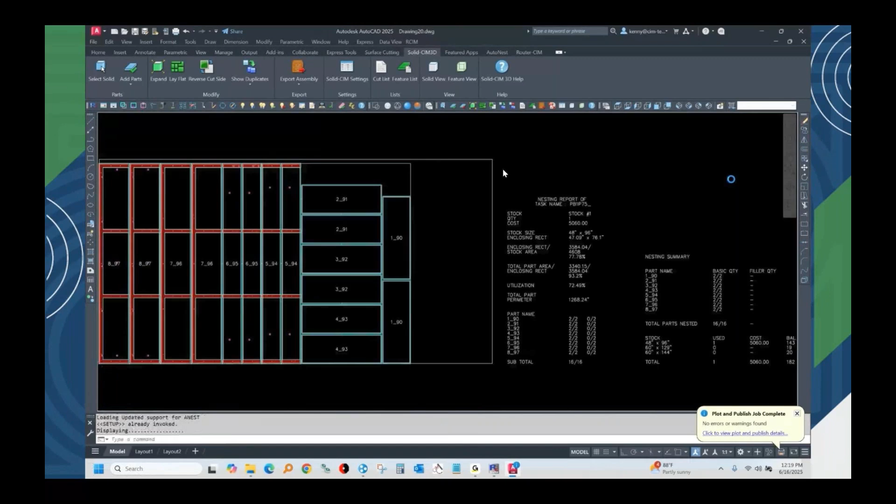And you see it had like 5 or 6 different materials on there. There's also a skeleton cut - how many times do you have a long piece of material left over at the top? We can use the router to chop that up into maybe 25 inches long, so you don't have to whack it against the dumpster to break up the long scraps. There's a great automatic scrap management system - it'll roll the scraps into the next job for you.

And so that was a good example to show you: hey, look, it took 3 different assemblies and mixed them together with large quantities of each.

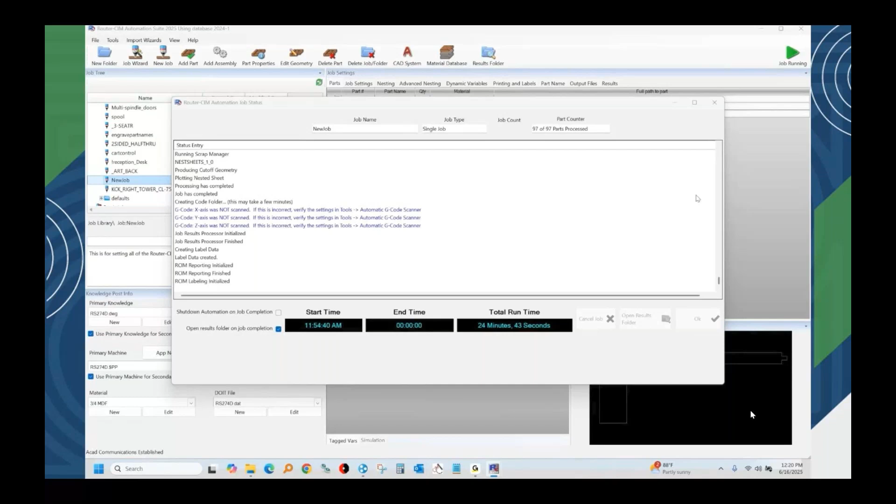Some of the stuff we didn't talk about here in this video was things like cart control, where if you have 10 different customers mixed together, or 10 different products mixed together, you wouldn't want all 10 products on one nested sheet. Because you probably have a cart to take the parts off the router and put them onto, and then they go to paint or finish, wherever they go next. So you can limit that and say, okay, no more than 3 carts at a time - so it wouldn't have more than 3 different customers at a time on a single sheet. It's great for unloading that way.

So there's all the results. We got hundreds of single part drawings, and then we got all the individual NC code files for all those parts. Then we get the nested sheets for all those parts. We got the labels for all those parts, and we got all the reporting for all those parts as well. So you can get a lot of data very quickly in Router-CIM, and like I said, the labeling is all fully customizable. There's even something called

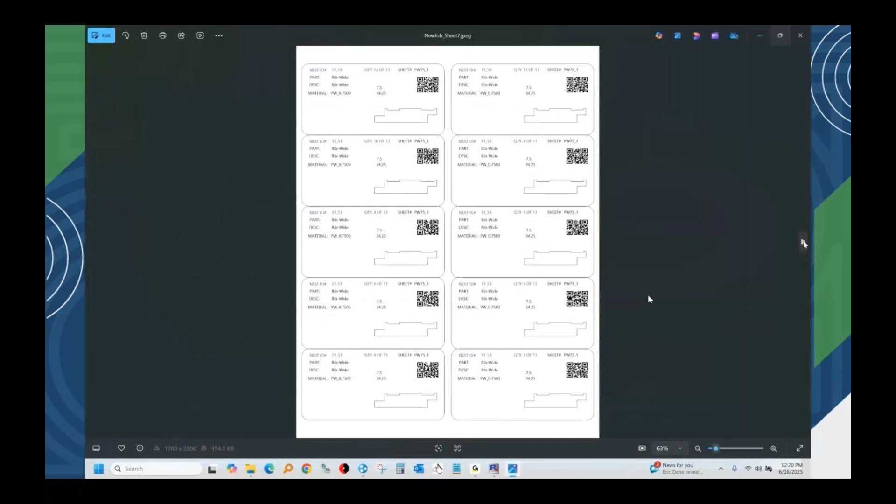multi-post, that lets you take and run these jobs for multiple machines. Run it for an Onsrud, then output it for a Biesse, and also output it for a HOMAG. All 3 of those machines need very different code, but we've got a multi-post feature that lets you output the program to multiple machines.

There's another feature in there too, called automatic G-code scanner. And what that does for you, it automatically checks the programs - if there's any Z values that are too deep, it'll check them and put them in a separate folder for you.

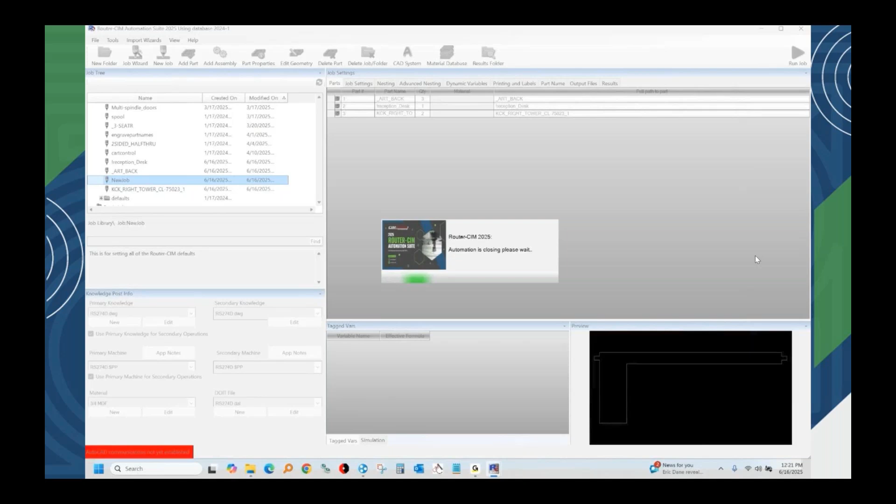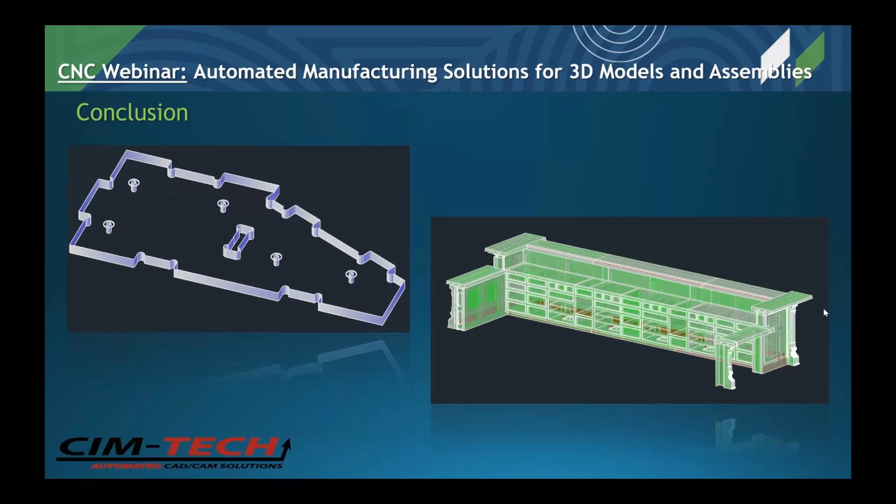And now let's get into the Q&A section of the webinar. It looks like some of you did start submitting questions, so we have a couple to work with. First one, Kenny, that we have popped up.

Does Solid-CIM only work with assembly models, or can it handle multi-body part models? It works with either one. It works for multi-body parts, no problem at all. Depending on your modeling program, though, the name might become an issue, so it'll start using the original assembly name and then number the parts 1, 2, 3, 4, etc. If it's a full assembly, each part needs its own name, but with a multi-body, you don't always get the whole name for each part, so it'll use the multi-body name and start numbering it. But it has full support for multi-body parts, no problem at all.